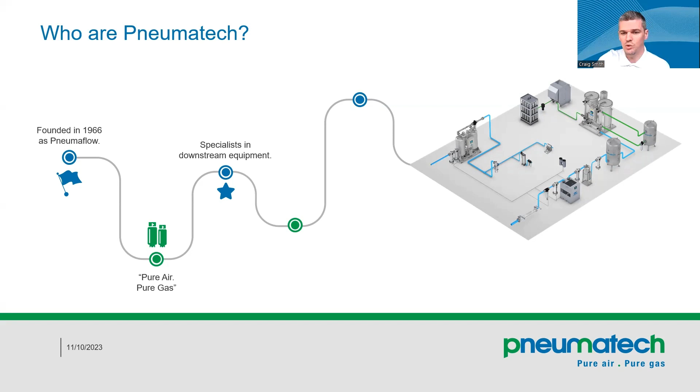But in 1966, Pneumatech were founded as Pneumaflow. Our tagline is pure air, pure gas. We're specialists in downstream equipment, so that is anything to do with compressed air, but downstream of the compressor itself. We focus on filtration, dryers, gas generation solutions, as opposed to focusing on the compressor and having these as a somewhat add-on.

It sits within the Atlas Copco Group as a brand portfolio, as an expert brand. So we were acquired by Atlas Copco in 2005 and have been taken on, as I say, as an expert brand for all things air treatment and gas generation. Headquartered in Erkelenz in Germany, but based locally in Warrington in the UK.

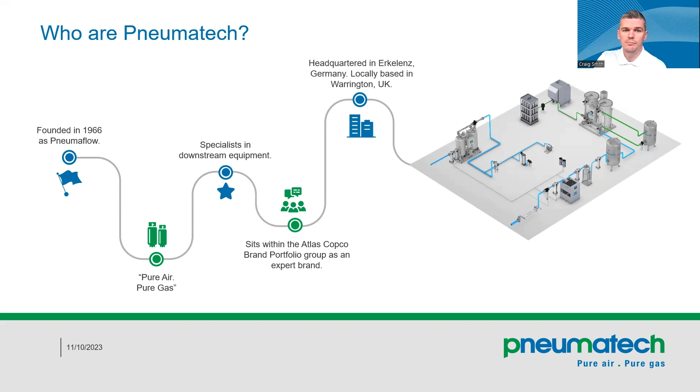So what is on-site generation? So nitrogen generation is a process of taking compressed ambient air and filtering out the oxygen to the desired purity or quality. Given that nitrogen makes up around 78% of the air that we breathe, it's possible to filter the nitrogen to purities as high as 99.999%, 10 parts per million. The European Industrial Gas Association references 99% as the minimum purity for food-grade nitrogen.

However, of course, this is very subjective in the food and drinks industry, depending on the requirement and the product and packaging. So for modified atmospheric packaging, sometimes to extend the shelf life, it will increase the purity. But 99% is the kind of acceptable level for the general food industry. But for breweries, in our experience, we've found purity somewhere between 99.5 and 99.9% being the sweet spot for all processes. Of course, we can't use nitrogen for carbonation, and the high quality filtering is something else that brewers have fed back that they still use their CO2 for.

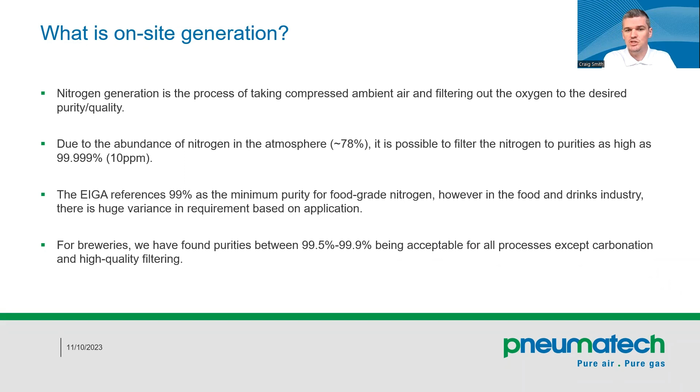So the nitrogen generation technology, there's two methods of technology in on-site generation. There's PSA, which is pressure swing adsorption, and there's the membrane. So the PSA is a little bit more complex in terms of the installation required, and the technology itself is somewhat more technical, but it is the most efficient way of generating your own nitrogen. The membrane is a little bit more simplistic in the respect that all of the required filtration, etc., is already included, and therefore it is effectively a plug and play system.

So I will run a very quick video. I believe the audio should be muted on it. I'll make sure it is. And I'll just very quickly talk through the differences in the systems. I will not run through the full videos as they are somewhat extensive.

So for the PSA system, we have compressors. So in this case, 3 compressors. However, on a smaller scale, of course, we'd have 1 compressor, filter into an air tank, which goes into the nitrogen generator, and then into a nitrogen tank.

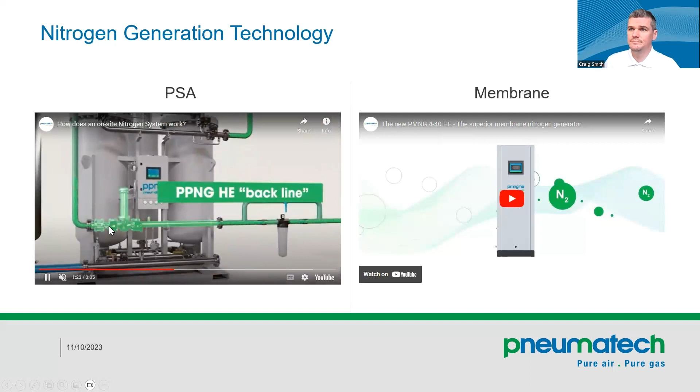In which case it's then fed back through our nitrogen generator via a dust filter, and at this point 3 measurements are occurring before reaching your line. So it measures pressure, purity, and flow. Now, of course, the most important being, in your case, purity, and therefore it measures before going back into your system the purity of the nitrogen.

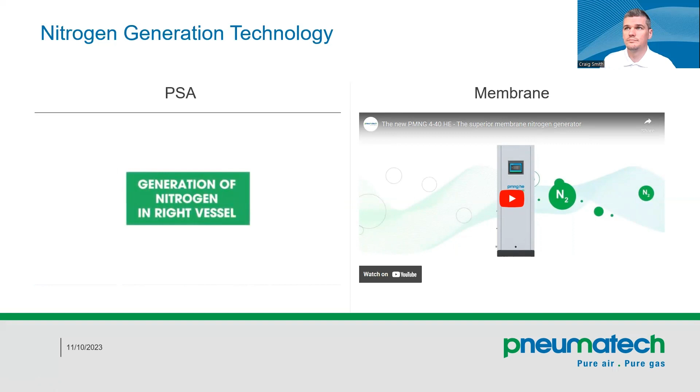So as the nitrogen vessel here on the left gets somewhat saturated with the oxygen, the left vessel opens the valves to the right vessel, and it fills the right vessel until the pressure is equalized. Closes these valves, so it makes the right vessel the operational filtering vessel. Again, it just runs a very similar process here, but it starts from, if you will, a clean filter.

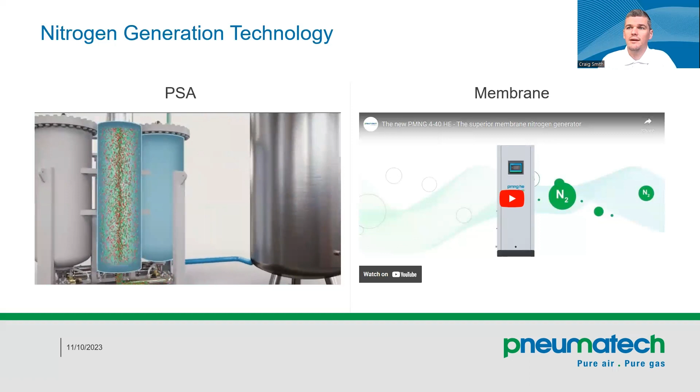Again, nitrogen from the right vessel is then generated and sent out to the nitrogen tank, where it will be sent through the generator again. The saturated oxygen vessel, in this case the left vessel, then has valves opened at the back, and the saturated oxygen is then purged out from a silencer at the back.

Now, there's plenty of calculations about how the release of oxygen-enriched air could impact the ambient in terms of asphyxiant or flammability, but in general cases, this is not an issue. Whilst there's oxygen-enriched air being put out, providing there's adequate ventilation, it never reaches anywhere near an unsafe level. We do have the oxygen monitors that you could put locally if you were concerned, or if it was such a small space that the silencer could impact the ambient.

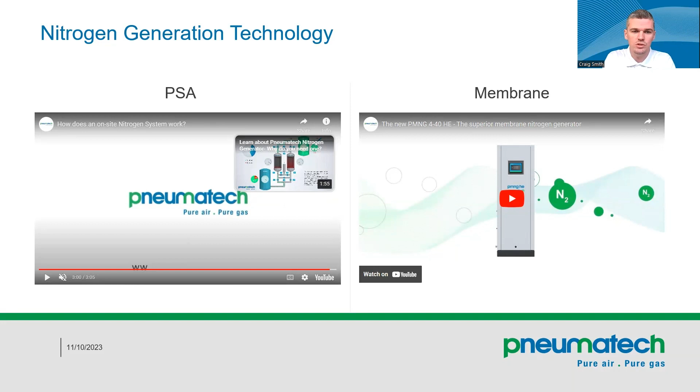But in general cases, this is not something that's a huge issue, and indeed we do have the calculations available to kind of validate this claim to you. So that's pressure swing adsorption, as I say, compressor, filtration, 2 tanks, and the generator. Generator changes over as the media becomes somewhat saturated with oxygen. So the PSA technology is, as I say, the most efficient way of generating your nitrogen.

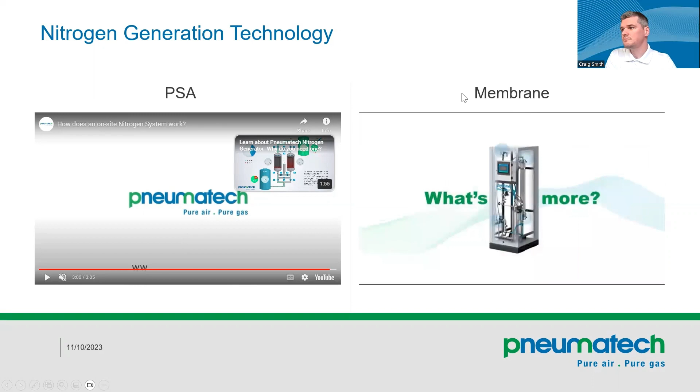So the other option here is the membrane system, which we'll show now. So there's no need for external tanks, no need for extra filters. The membrane system has its own filtration built in. So it's pretty much compressed air in, nitrogen out. A little bit about the algorithm, which isn't necessarily important at this point. But there you can see it has the inbuilt filtration, and then all you would need on the outlet would be a storage tank. Silent for close proximity to users, potentially in the brewery space. But again, the beauty of the membrane system is that it's effectively air in, nitrogen out.

So how does it work? So the compressed air comes in here into the membrane, which is filled with hollow fibres. The air passes through the fibres, and due to the higher permeability rate of the water and the oxygen, the flow through the membrane leads to the filtration of the oxygen and water being filtered out through permeation, and therefore it is then exhausted from this little valve where only the nitrogen continues on.

Now, one thing I'll maybe mention, and maybe could have mentioned on this side too, is that the purity is relative to the flow. So on either system, if you increase the flow through the same generator, then the contact time with the media, in the case of the pressure swing adsorption, and the contact time for permeability in the membrane side is decreased. Therefore, high flow is lower purity.

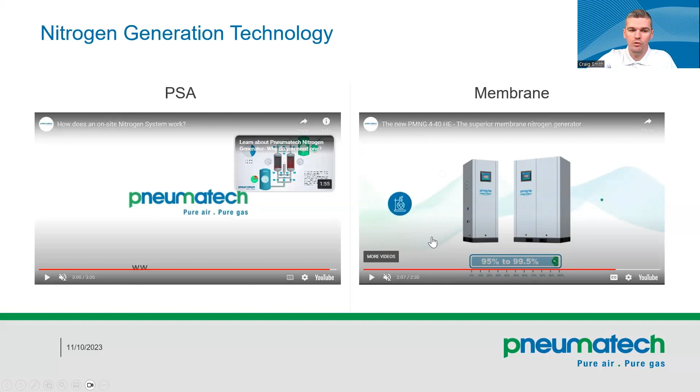And again, a little bit about the range. This is sized for 95 to 99.5% purity. So again, this would be the lower purity end of this sweet spot. However, as I say, there are membrane generators in the market and brewers who absolutely vouch for it. It's just a kind of personal preference as to the technology that brewers are opting for. But I guess what we are showing is that there are options available.

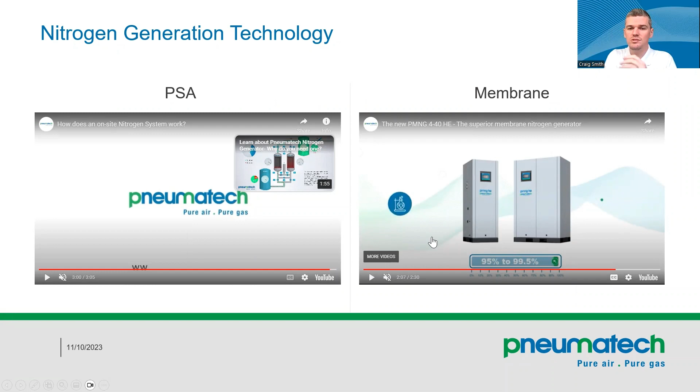If you have maybe a little bit more floor space or are a higher flow user, the PSA might be best in terms of total cost of ownership, or perhaps you're a small brewer, maybe urban, where footprint is at a premium, as it is in almost every brewery that we've visited. So it depends on which of the technologies is best suited to your brewery, because ultimately they both save quite a bit of money.

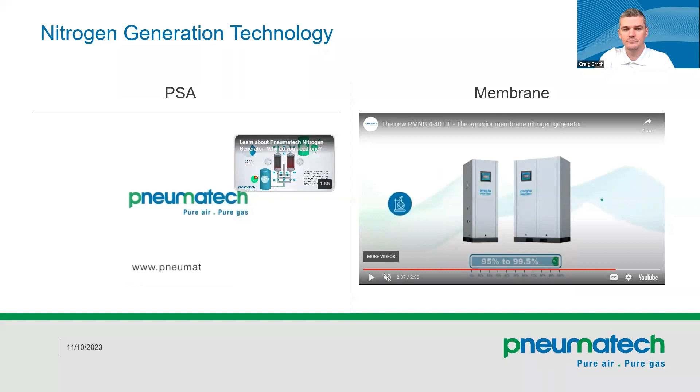So how can it benefit brewers? Again, this is the most important part. The main theme, of course, in the brewing industry at the moment is sustainability. Whilst I'm no real expert on the production of carbon dioxide from these ammonia plants, even if it is a byproduct, which of course it is, the carbon dioxide then has to be captured, packaged, and transported to the gas production sites, where it is then repackaged and sent to the local hubs before potentially being repackaged again and out to the brewery, to the food factory, and to Company Z as well.

So the number of miles and the carbon emissions this can produce make it quite a carbon intensive process. That is assuming, of course, that we don't then need to boost it again for the high pressure bottles, which is another carbon intensity added to the carbon footprint of your beer. So we found that generating your own nitrogen, using compressed air, which is abundant, or ambient air compressed to the pressure you need with the oxygen filtered out, is a much more efficient, effective, and cost-saving exercise.

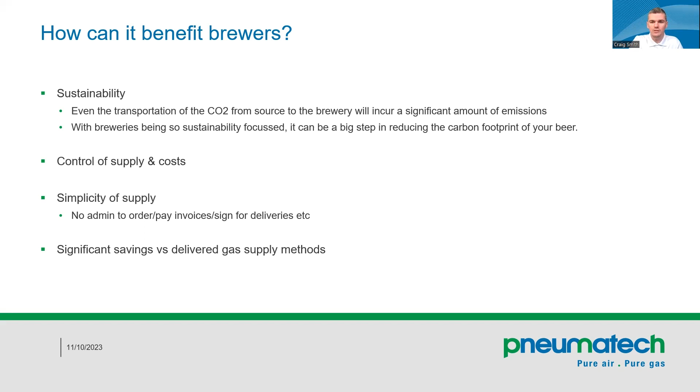As a go-to, most people opt for somewhere in the region of maybe 70%. However, what we've found is that when we do install these systems, given the savings versus CO2, for example, brewers are trying to use it for everything they can, and the quality of the nitrogen is such that it doesn't have an impact on your DO.

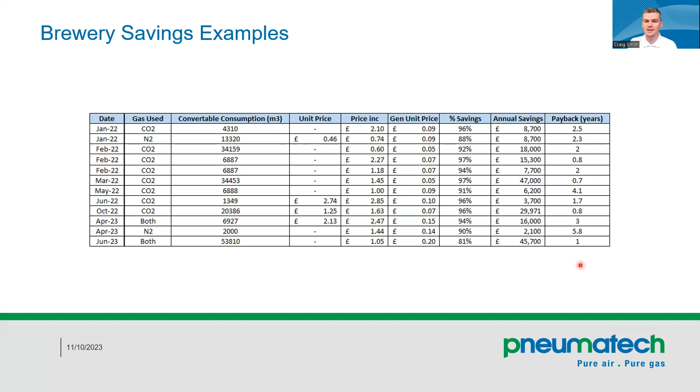So, as I mentioned, there's so many factors which affect your savings, which is why we want to deal with things on a case-by-case basis, and don't want to throw any blanket terms out there. So the existing gas cost, you can see the huge variance in what people are paying, anywhere between 60p and £2.85. So people are paying more than 4 times what others are paying.

The percentage that can be converted to nitrogen, of course, as you lower this, the savings reduce naturally. The electricity cost, again, has a direct impact on it. The existing compressor efficiency, the compressor pressure, again, it's how efficiently you can get that compressed air to the generator. Has a decent sized bearing on the savings. So, generator technology, generator purity, we very much touched on as well.

Again, I will open up another spreadsheet for you, which hopefully can highlight the expanded version of how we reach the impact that each of these components has. Now, I'll not go into this in any great depth, but I figured it would be good to validate where each of the different components come from, and maybe help you understand the variations in savings from brewery to brewery, who may be similar in production, but can be widely different in terms of payback, etc. So I've minimised everything on this table at the moment.

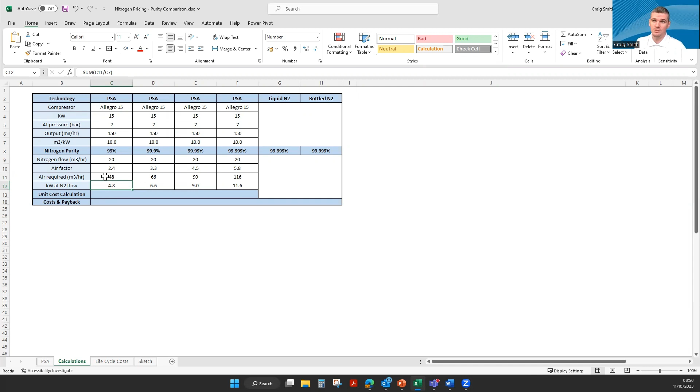So moving back onto this, to produce the 48 meters cubed per hour, assuming 10 meters cubed per kilowatt, then again, on a very basic calculation, it would take 4.8 kilowatts to produce the 48 meters cubed per hour, and subsequently, the 4.8 kilowatts is what we would need to produce 20 meters cubed per hour of nitrogen. And the calculation, of course, is continued across.

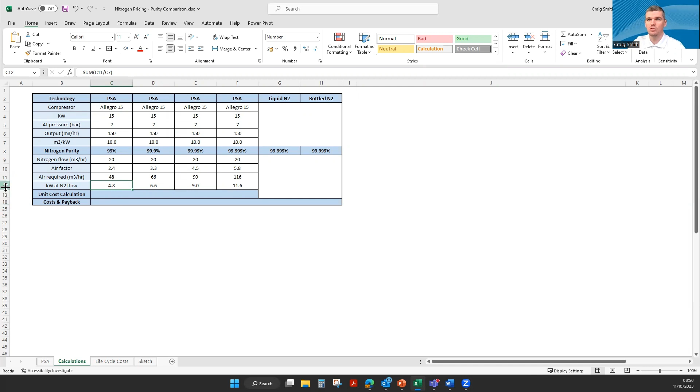So working it out further, we take the 4.8 kilowatt and divide it by the 20 meters cubed per hour to give you a number of kilowatts required for every 1 meter cubed of nitrogen. We then multiply it up by your electricity price, and it gives you a unit cost per meter cubed of nitrogen. If you remember, that's what we work to, and we always try and calculate it out to have a unit cost per meter cubed, because that's the easiest direct comparison. If we change, as I say, we then have 9.6, in this case, 13.2 pence, 18 pence, etc.

Now, liquid nitrogen, should you purchase liquid nitrogen, is somewhere in the region of 50 pence per meter cubed, bottled being anywhere upwards of £1 probably. In this market, we obviously have this in to compare for existing nitrogen users. But what I wanted to highlight, and this is why I've put this in a working spreadsheet as opposed to a screenshot: if we were to change the efficiency of the compressor and keep everything else the same, this 9.6 goes to 14.4. So there's variance there in the first instance.

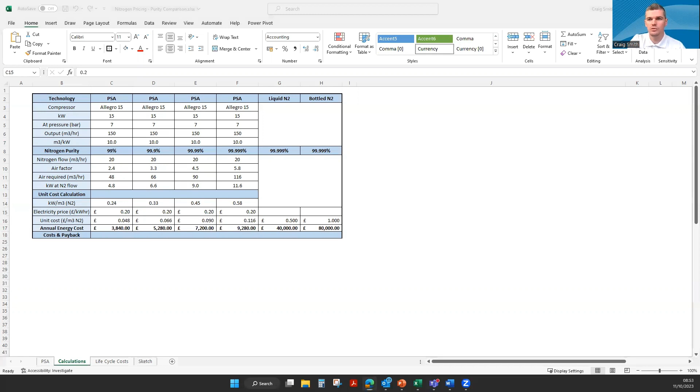I will then bring up what we have now, which is, hopefully this will just cross here. So what we are in the process, again, this is very much a working document. What we're in the process of looking at is providing brewers with a very quick feasibility calculator, let's say. Is my nitrogen or my current CO2 cost enough to justify this as a project?

So most people know the majority of this, with the green in these cases being the input cells. So if we have a current consumption of 3 tons per week, and you want to change, as I say, let's say 70% to nitrogen with an existing cost per ton of CO2, let's say £400, and an electricity rate of, that would be very favourable at the moment, so let's say 40 pence per kilowatt hour. We can input these, or you of course can input these, and reach the cost of your existing supply

per meter cubed, the cost of on-site generation based on 99.9% purity, based on the 10 meters cubed per kilowatt efficiency that we ran through, and then, as I say, you put in your own variables here to give a kind of snapshot of saving, because to run through this with everyone on a one-to-one basis, sometimes people think it's going to be much more hassle than it's worth.

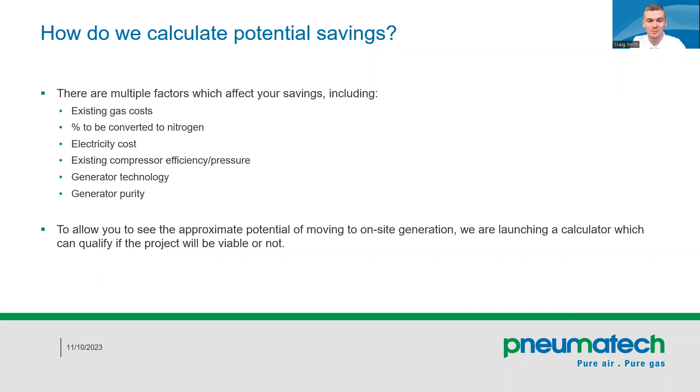So I'll maybe include a screenshot from the other calculator that we just looked through with the compressor efficiency, etc. So I'll include everything so that you can have even a screenshot of it all. I'll have a live version of this sent out alongside it, so you can put in your own inputs and calculate your own savings. Now to get back to, there we go. So you can see that to allow you to approximate the potential of moving to on-site generation, we're launching, and our marketing team will kill me for showing that prior to it being complete, but I think that's worth showing.

So I'm aware of the time, and it doesn't surprise me that I've rambled on, but I'll run through these very quickly. So Full Circle Brew Co, we'll also include a copy of the report we've done for Full Circle Brew Co. I've blanked out some of the key figures. We're currently in the process of launching a Pneumatech/Full Circle Brew branded beer.

We're going to do, I think, about 250 cans of these, which will be given out to brewers, at the Brewers Congress, for example, next week, and other events as a kind of marketing thing to say, you know, Full Circle Brew Co have done this. They've benefited with X, Y, and Z, and there'll be a little QR code to go to our website and things. We think the can idea is a very cool one, and we thank Alex at Full Circle, who's, I believe, quite well known in breweries, for his cooperation on this.

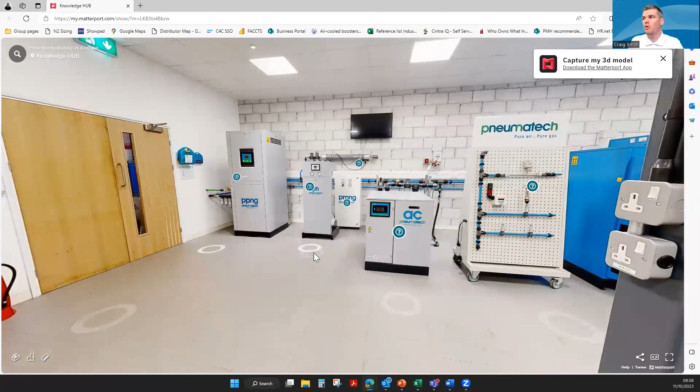I'll very quickly skip on to this. The other thing is that, as I say, we're based in the UK in Warrington. We have a knowledge hub, which Ruth visited, I believe, last year, which has a working nitrogen generator, amongst other things. So it's all things compressed air, nitrogen generation, air quality. So if you're local to Warrington, you're more than welcome to pop along and see us, and we can show you the nitrogen generator and run through a few more things with you.

And then finally, we're also going to bring out a couple of rental solutions. We're hoping to have these available in November: a pressure swing adsorption system and a membrane system. As I say, you might not know what you need in terms of purity as yet. So we want to qualify and validate mainly the purity and the quality of the nitrogen as opposed to the savings, because as I say, there's lots of variables there.

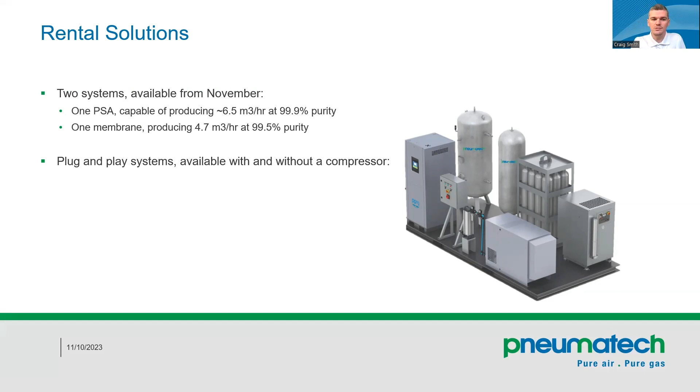What we want to give you is plug-and-play systems available with and without a compressor. This is, of course, a high-pressure skid with a high-pressure bottle pack. It'll be something along the lines of compressor, filtration, generator, and a couple of storage tanks, so that we don't need lengthy installs at site. The membrane one will be even more simplistic, as I say, with and without a compressor. So if you're interested in trialing the technology and finding out for yourselves, then by all means, please do reach out.

So I finally reached the questions. If you have any questions, which I believe there are a few, sorry, I need to open up the Zoom again. I think you've answered most of the questions, Craig, as you went along. I was thinking, and then you answered. It was like telepathy.

But I know Mike had a question, which is, what is the footprint of the post-generation storage system? Well, that changes from system to system. Some people will opt for an on-demand system. So Alex, for example, at Full Circle, has pretty much an on-demand system with a 2,000 litre storage. Whereas down in Pressure Drop Brewing, for example, in London, they have a much smaller generator, but huge storage. They have two 1,500 litre tanks.

So Ben can regenerate that overnight or over the weekend and draw off storage because his compressor is not always available. Whereas Alex, as I say, at Full Circle, has an on-demand system. So the amount of storage you need depends on whether you fill it up overnight or whether you size the generator a little bit bigger and have an on-demand system.

Brilliant. So you answered all my questions. And I think sharing the savings calculation template will be very helpful and useful, and that will then help brewers establish what the payback timeline is and if it's viable for their size of production unit.